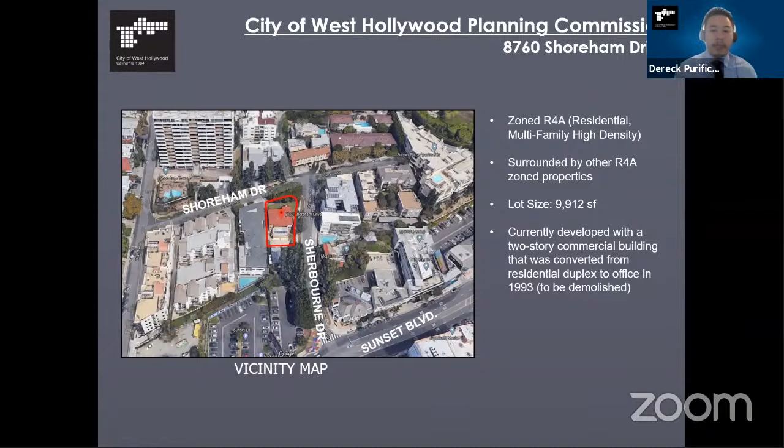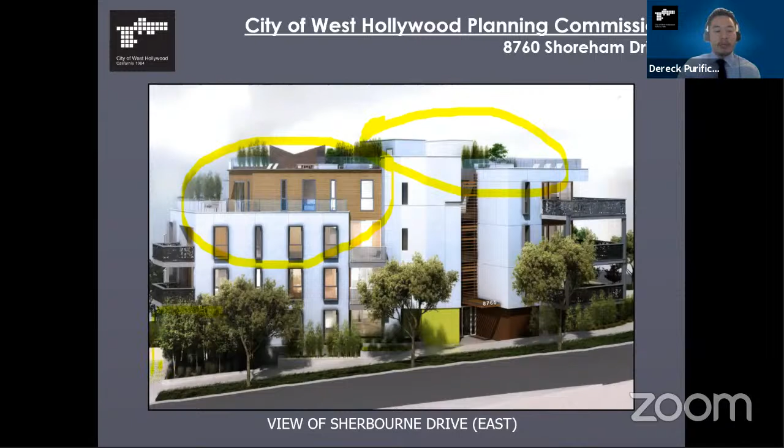The subterranean garage houses 23 parking spaces, all required parking spaces. Two of those spaces are ADA accessible, found here and here. 16 of those spaces are standard spaces, with a standard parking space being 8.5 by 18. And 5 of those spaces are modified.

Part of the modification the applicant is requesting is to modify the depth of the parking space, reduced from 18 feet to 16 feet 2 inches. Those spaces, as far as width goes, will vary between 9 feet and 9.5 feet. The drive aisle will vary between 24 to 26 feet. Where it narrows down a bit, that's where it would be 24 feet; majority everywhere else, you'll see 26 feet.

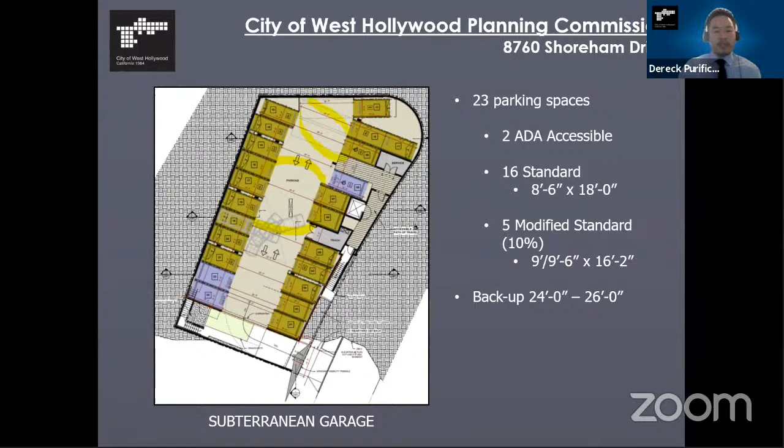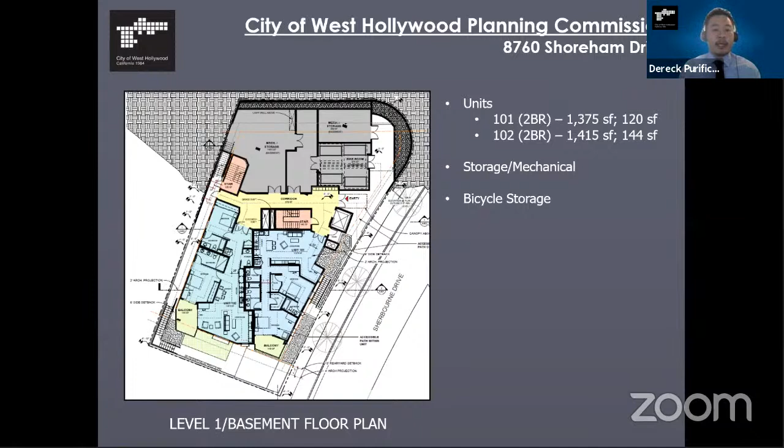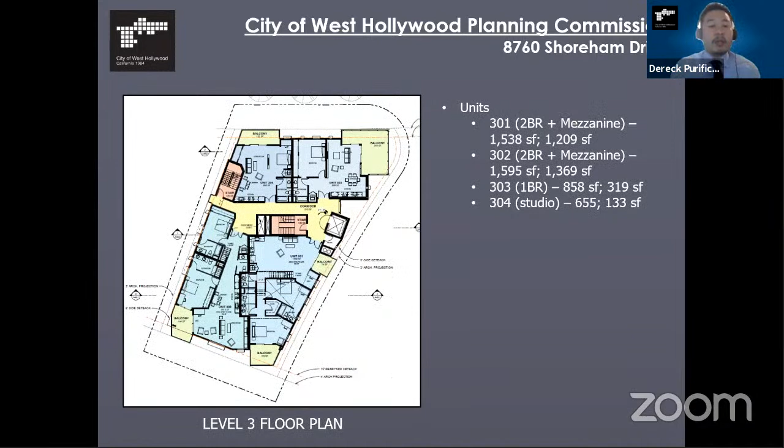Just a quick overview of each floor plan. The basement floor plan and level 1 house units 101, 102, as well as bicycle storage and mechanical rooms. Level 2 houses units 201, 202, 203, 204, each with private open space via balconies. On the 3rd floor are units 301, 302, 303, 304. And on level 4 and mezzanine level, it's just unit 401, on the north side of the building.

This next slide is the roof plan. Essentially, you'll see 3 roof decks, which are private open spaces for units 301, 302, and 401. Here you'll also see solar panels, as well as HVAC or mechanical equipment.

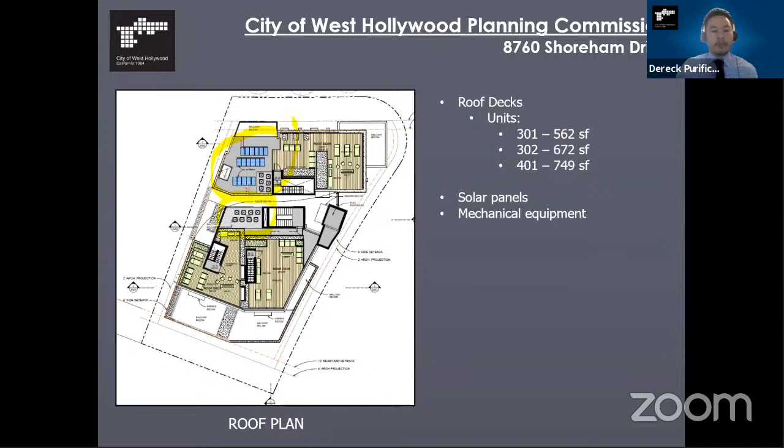To go over real quick some of the changes the applicant made—they'll go into a lot more detail, but briefly, some of the obvious things you'll notice on the right side of the slide is what they're proposing today.

On the left side is what they proposed last year at the last planning commission. As I mentioned, the commission felt that maneuverability was really tight with tandem parking spaces.

A reduced backup space meant you'd be making 4, maybe 5-point turns. These spaces here, the ADA spaces, some commissioners pointed out that the backup space going into the elevator was really tight. So the applicant made some revisions. They took away the majority of the tandem spaces, with the exception of 2 of them up here on your upper right-hand corner, and relocated them to the other side.

The parking spaces that are modified do have a wider space. Basically the rule of thumb we gave them was: if the ideal backup space is 26 feet, for every foot you reduce that backup space, we require an additional 6 inches in width of the parking space. So for example, if you've got a 25-foot backup space, instead of an 8'6" width parking stall, you would need a 9-foot width parking stall. That's what they've done here.

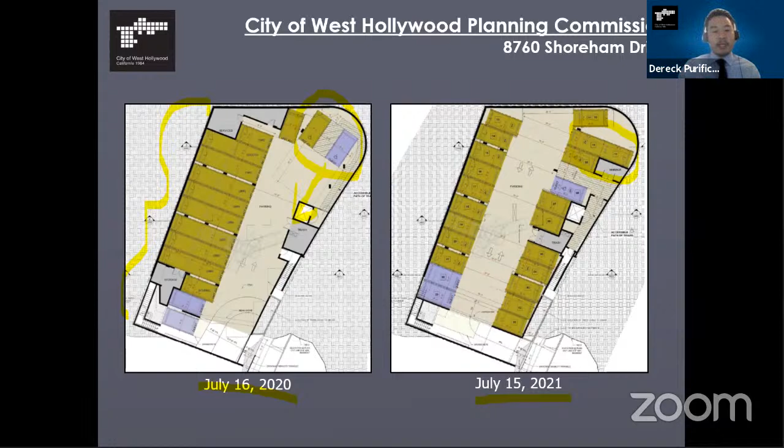That addressed concern 1. Concern 2 had to do with the average unit size. This is just an example of one of the floor plans. They used the same formula on all three floor plans, but the corridors were enlarged here, as well as some of the balconies.

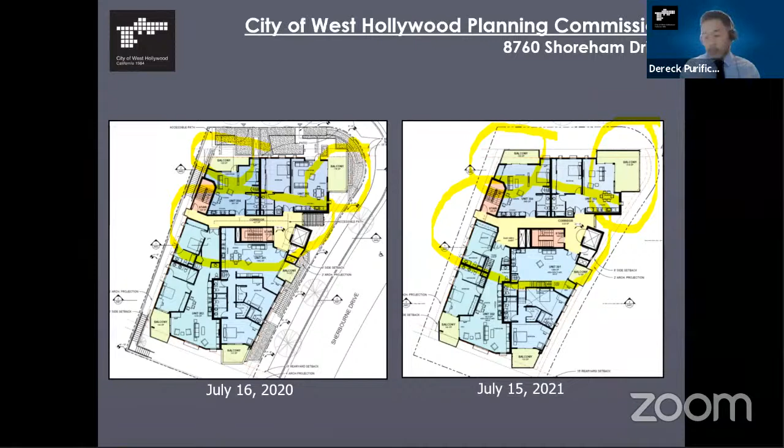By increasing the private open space, common areas, or hallways, it ate up into the floor area of each unit, and therefore they were able to reduce square footages. On this next slide you'll see how they were reduced. Open spaces were increased, floor spaces were reduced, and they were able to get to exactly 1,200 square feet for the average unit size. Some may be larger, some may be lower, but the average unit size will be 1,200 square feet, which is the maximum allowed in the R4 zone.

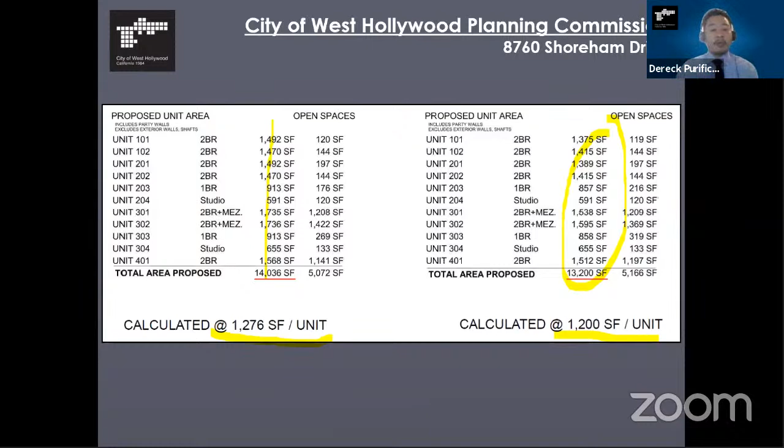With all that being said, the applicant has revised the project to address the Planning Commission's concerns from the last meeting last year. They were able to improve maneuverability in the garage and removed the modification for the maximum average unit size. This project will redevelop the underutilized property and also provide 9 net dwelling units.

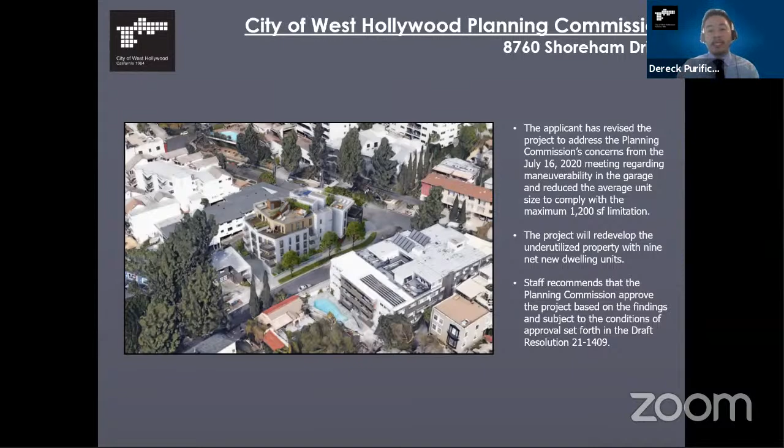Staff recommends that the Planning Commission approve this project subject to the findings and conditions of approval set forth in resolution 21-1409. That concludes my presentation. I'm here to answer any questions you may have.

Thank you. Okay, does anyone have questions for staff? Commissioner Lombardi? Sure, thank you Chair Hoopen-Garner. I have just a couple of quick questions, just to make sure I'm understanding the history.

Being a newer commissioner, was anything reviewed by HPC, and could you maybe provide a recap if so? As part of the revision, it didn't go back to HPC—it never originally went to HPC. There was an HRA done, a historic evaluation of the property, and it was found that the property was not historic. But that review does not actually go to HPC, it's reviewed at staff level, where we have our consultant help us out and confirm what their consultant is saying about whether the property is considered historic or not.

Since it's been revised, it did not have to submit a brand new HRA. Were there any key notes, 1 or 2 items, as to why it was not deemed historic? Offhand I do not know that answer. I can go back to the HRA and take a look at the summary while you guys are deliberating. That'd be great, I'm happy to do that.

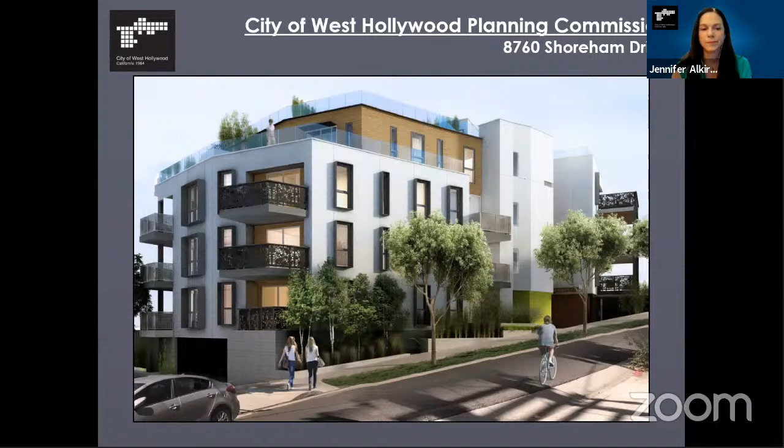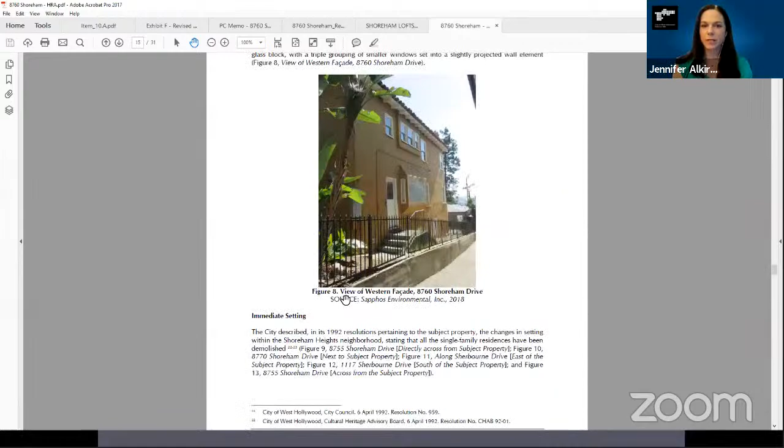Dereck, is it built to the R4 standard maximum? It is, because the R4 is roughly 50 units per acre, which is above, was it 35 per acre? Is the assumption R2 for RHNA? I don't know that offhand, but this is our densest zone. Would this count toward the new cycle? I believe so, but we would have to confirm that. I'd have to look at the numbers. Okay, those are my questions. Thank you.

Thank you, Commissioner. Commissioner Vincent, did I see your hand? Yes, thank you, Chair.

Can you explain to those watching in the public how it works when you have a building on a hill, how the maximum height, 3-story versus 4-story, works?

Sure, it's probably easier to show visually, but there's a couple different ways you can do it, and a couple things you need to take into consideration. Essentially, you take the allowable height from grade at the higher level, in this instance 35 feet, and then at the lower level you take that at 35 feet as well. You have a 45-degree angle, and it has to meet. The applicant actually has a pretty good visual of that in their presentation, and I think they'll be able to go over that. But that's one way you can do it.

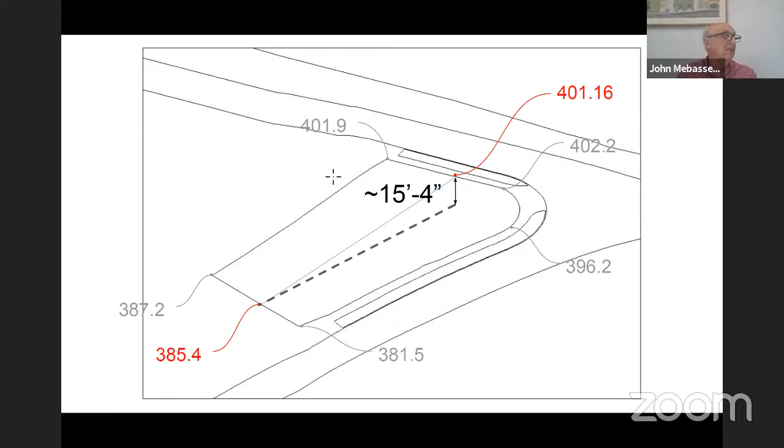So what I'll do is look at slide number 8 and 11. So this is how the height is measured. Basically, you take the average of the upper corner of the lots and the lower corner of the lot and draw a line, and then you establish the average height of the building, and then from there on you develop the height envelope, which is 35 feet, and then you go to a slope of 1 to 2 to get to the upper level, and then your building has to be within this limit.

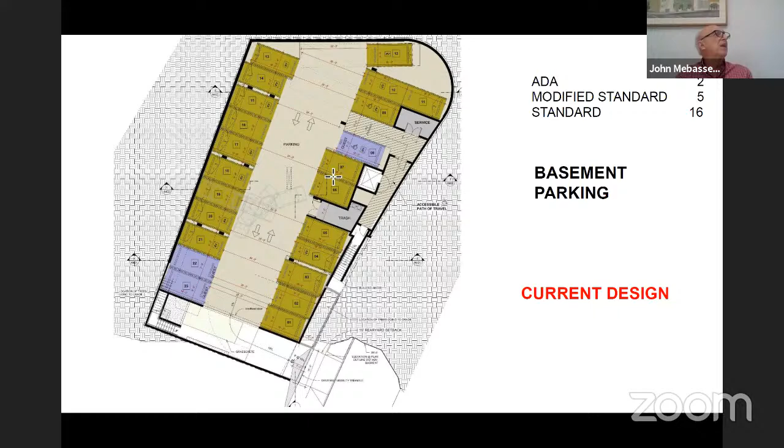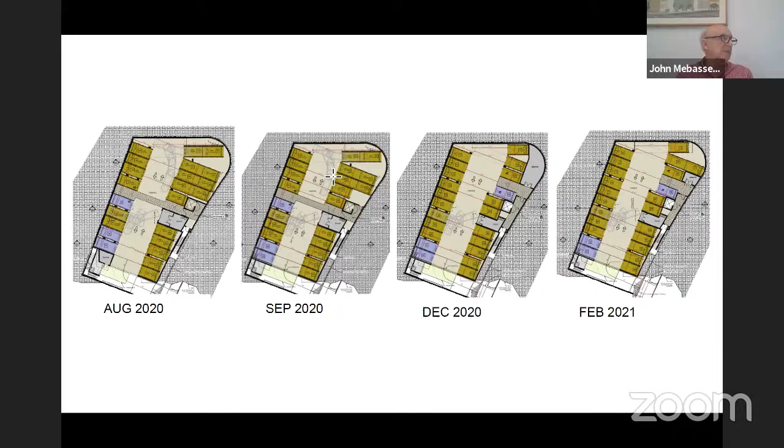Let's just flip through it. So these are the original parking as shown before, and then these are different variations of the same parking that we tried out to get the best result that we thought was agreeable. I just wanted to mention that the 24-foot parking backup space is allowed in LA City as well as City of Santa Monica, so you're within the same limits, if that is any consolation.

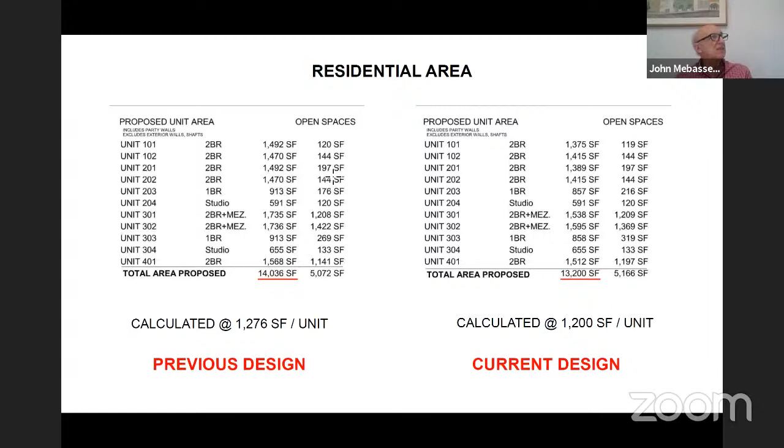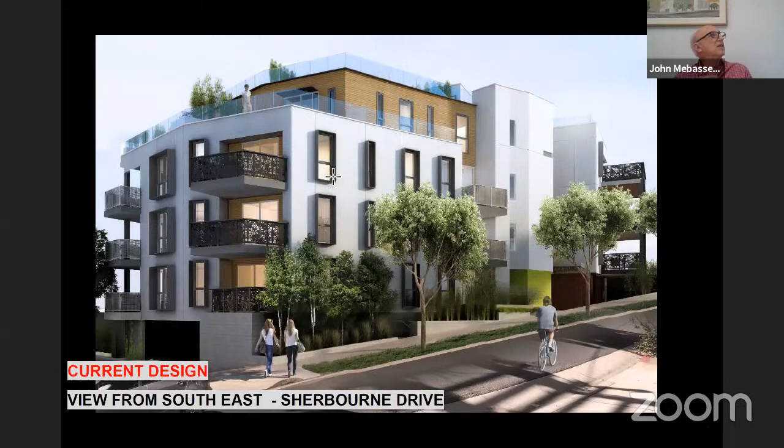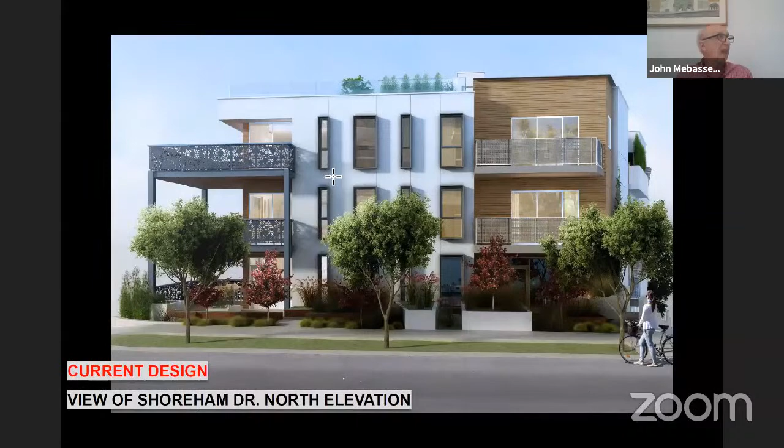And also here shows the average unit sizes and how we did it. And there we just go through to see what the difference is between the previous and the new design. Basically the difference is in the access to the roof, the stairs sticking up on the roof, and also some of the balcony railings, which provided for fixed window washing of the fixed windows and so on. Otherwise, we tried to keep the exterior facade exactly as we presented it before. So all the modification to average the unit size, we were able to do it within the existing building envelope.

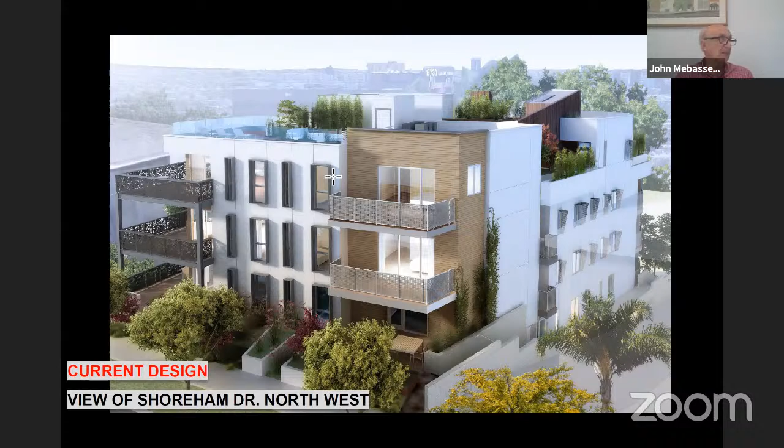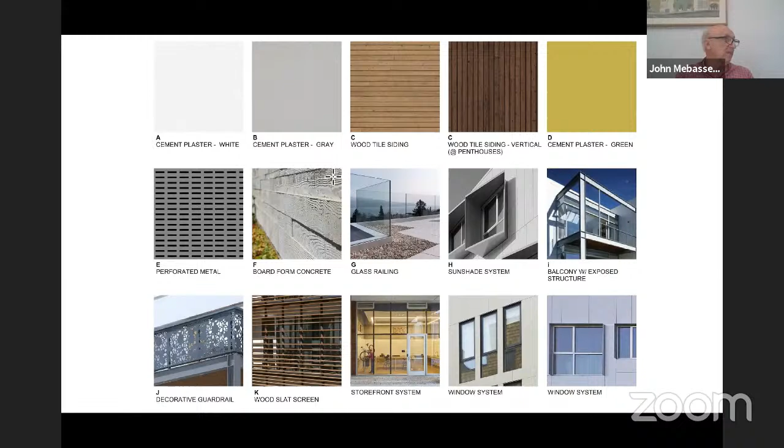And besides that, I don't know what else to talk about. I just wanted to basically talk about the balconies at the corner, which we thought was very desirable because it created a buffer between the public and the privacy of the living room. So it created a buffer, and that's where we got there.

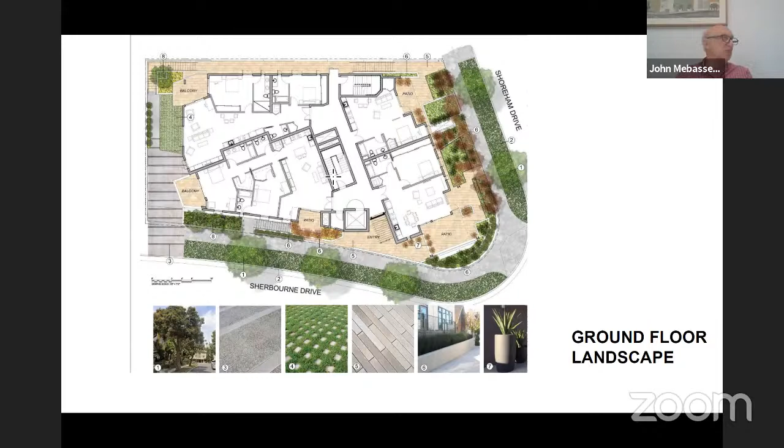And of course, I just wanted to talk about the open parking, open landscape areas, which are critical. We are about twice as much as is required. So I don't know if you're damned to give more landscape area or less, but we opted to do the most we could provide for certain units that it was possible to do so. And as far as permeable planters and permeable surfaces, yes, we have that basically—the reason for permeability is for the rainwater to be filtered, and by providing a permeable paver, the water is percolated through that and is filtered.

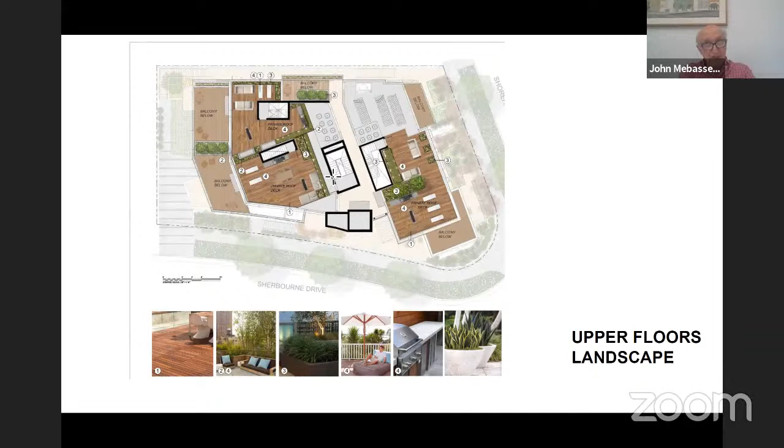And over the parking, the same. We have dirt under the pavers or under the planting, so that would filter the water, and then we discharge that water. So that's about as much as I thought you asked for. I'll leave it open to your discussion.

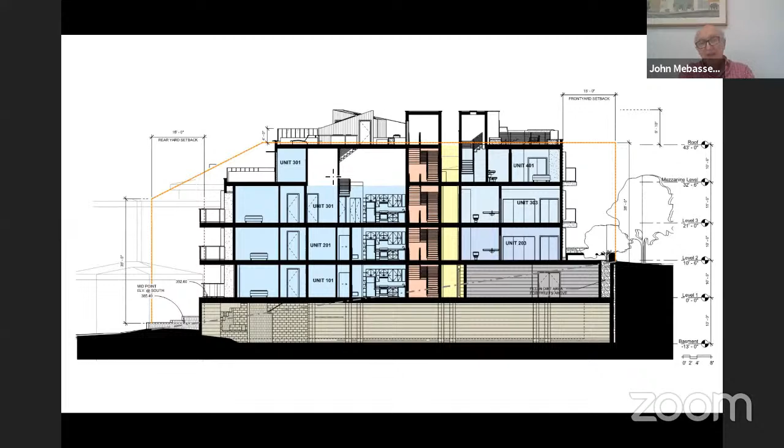And the last is how the building fits within the envelope. This section shows exactly what's going on, where the building is 3 floors on the lower side with the mezzanine above, and on the Shoreham side, it is 3 floors above a basement, which is defined by code to be a basement. So I thank the opportunity to present to you, and I'll be here to answer any questions that might come up.

Thank you. Are there questions for the architect?

Commissioner Vinson: I noticed on your square footage for the open space for unit 101, in your presentation you have 120 square feet, which is the minimum. But in the drawings that we were provided, it shows 119 square feet. Yeah, so that's basically moving the wall 1 inch or 2 to make the difference. We'll do that in the working drawing as we present it to the city, and it's going to show that. Basically, it's the computer, the way it averages the area that it calculates, and it automatically came to that. That's how it's shown.

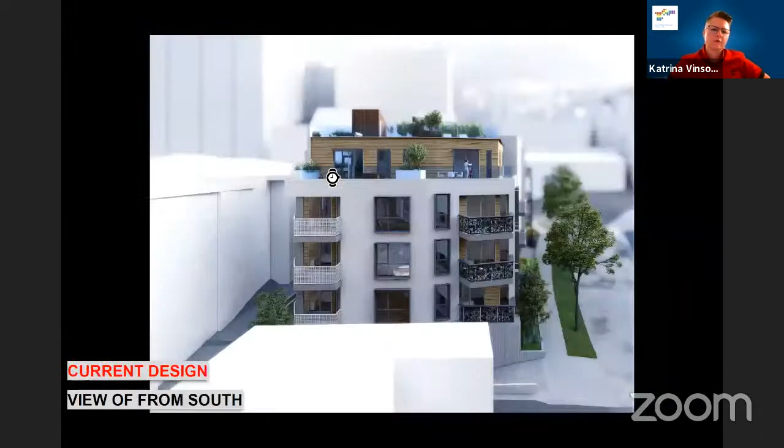Okay, can you one more time bring up the drawing for how you calculate the envelope? So I see that you go to a 2-to-1 slope. How do you know how far back, how do you calculate how far back to go to that 2-to-1 slope? So when you hit the upper surface, you have the 35 feet on Shoreham coming up on the right-hand side of the drawing, and then you take that plane and continue it to a point where the 2-to-1 hits it. So it creates an envelope.

But are you not going horizontal back and then dropping to a 2-to-1 slope? No, because you could have that 2-to-1 slope at those 2 different elevations. That gives you - the code doesn't require you to step back. It tells you to connect the 2 planes, the horizontal and the vertical plane, at the slope of 2-to-1. So you develop an envelope which is exactly like that. That's how the code is written.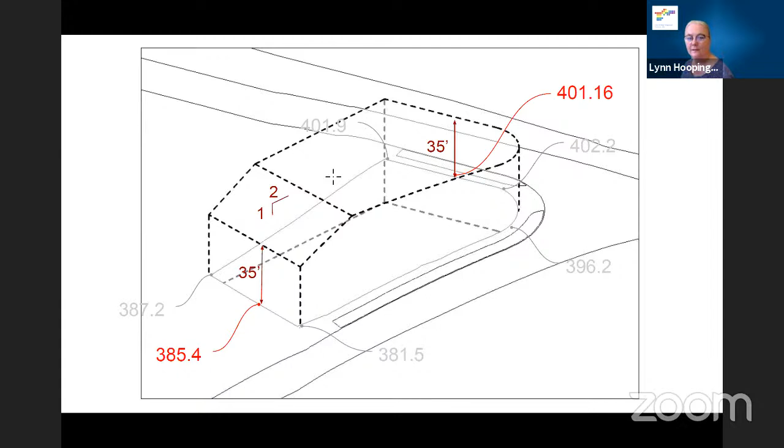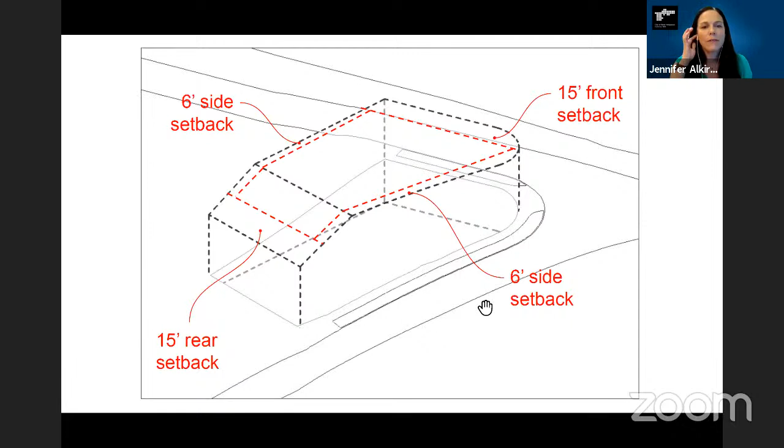So if I can share my screen, I think I can pull up where this is described in the code, and it might be a little bit easier to see. So John, if you could stop. Thank you. Let me just try this.

All right, and so do you see this, where it's the code language here? Yes, I can see it. Okay, so we take from the lower side, you measure the maximum height, which in this case I think is 35 feet, up to a point - that's that line. From the higher side, you do the same thing to 35 feet. Then from the lower side, you do an angle here, 2-to-1, from this line extending up into space forever. But then where this horizontal line comes and connects to it, that's where that intersection point happens. Does that make more sense? That makes total sense, I got it now. And I just wanted to clarify that too for the public. Great.

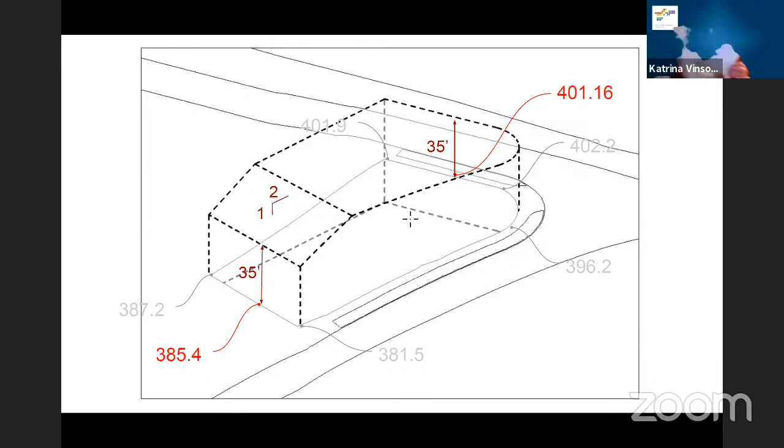My next question was - I noticed unit 204, which is by far the smallest unit, is less than half your average square footage per unit. Is there any way to increase the square footage of this unit? I also noticed most units have closet space in the bedroom - I realize this is a studio - but this one only has one closet, in the living room. I was wondering if there's any way to design it to increase the square footage.

I've been involved in designing a lot of units in San Francisco, and really we feel that you don't need that big of a space for a studio unit. Also, it could be sold at a much lower price than the other units, and also a much lower rental if it was to be rented.

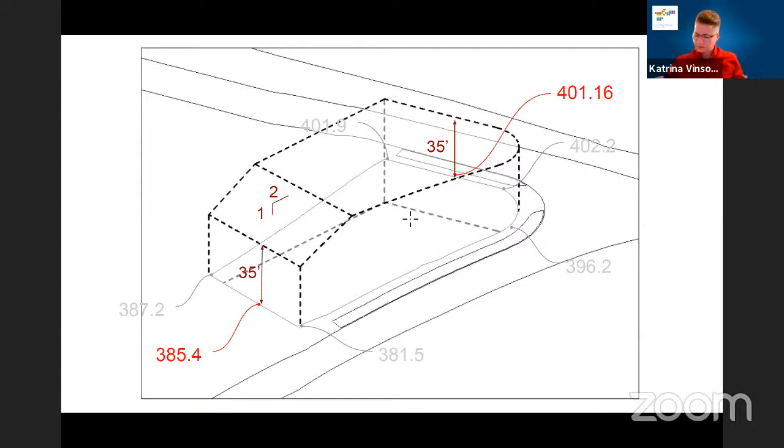My last question was on A203 - it seems there's a note for 306, but there's no unit 306. I believe that's just a typo, but I thought I'd point it out. Oh yeah, that's just a typo. Exactly. Okay, that's all my questions.

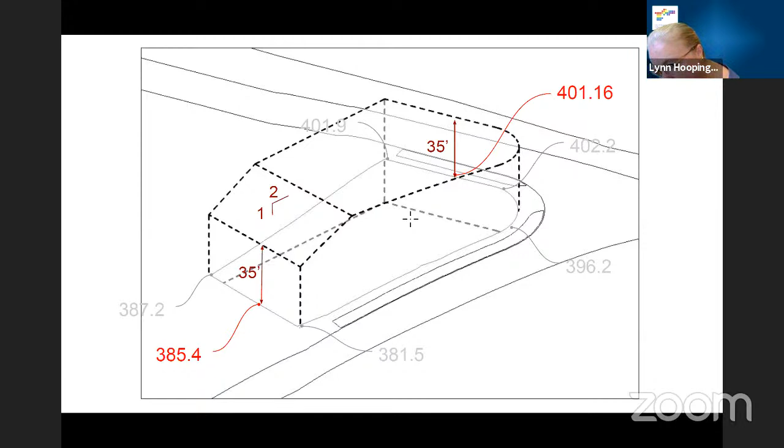Which planter are you talking about? Plant a deciduous canopy tree, minimum of 36-inch box, planted in the ground on exposed west and/or south elevations, 1 point per tree. You have awarded a point for the one strawberry tree that is planted in a planter on the east side of the building.

Well, we can also plant one in the area where the stair wraps up and goes on the podium deck at the parking level. If you look at that level, there is a planter opposite the driveway as you drive in, and we could have a tree there if the other tree doesn't meet the requirement. So the point is the planter.

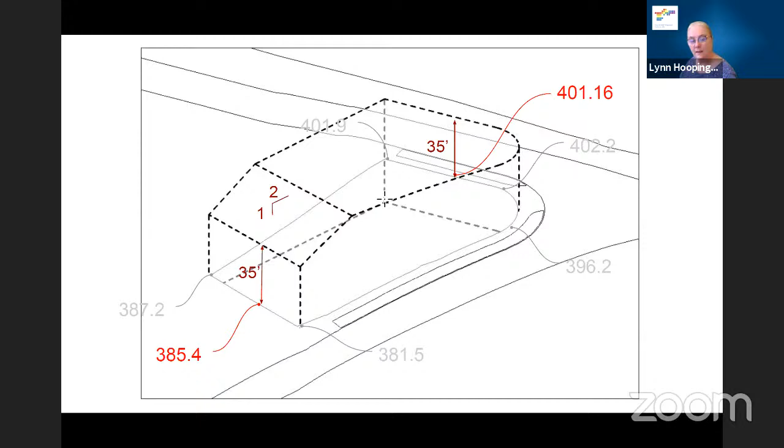There it is, it's on the landscape drawing. Maybe we could show that. It's on L10. Yes.

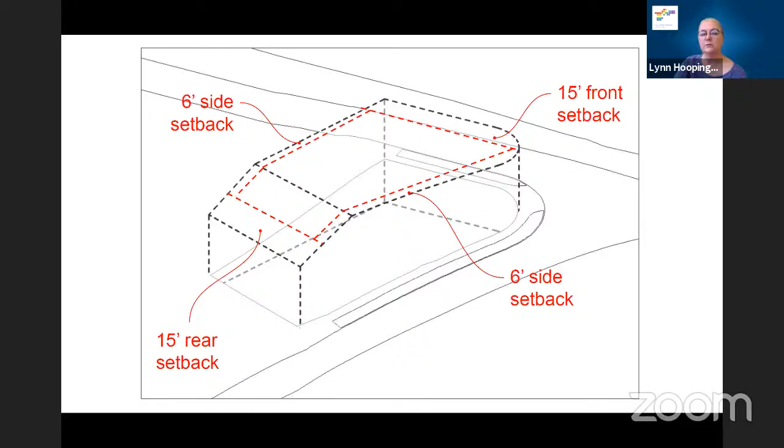The point is that a canopy tree needs to be planted in the ground. It is on the ground. There's nothing that says it's in a planter. No, it says there are planter walls, but there is no concrete below it. So it's a raised planter of 3.5, 4 feet, and the tree is planted in it, but there is no basin, no concrete floor. The planter has an open bottom, so it's into the dirt.

But it's above the garage. No, it's not. The garage starts beyond to the right of the driveway, not there. There is no garage underneath this surface. It's a continuation surface of the driveway coming into the garage.

Okay, then the landscape plan is what was confusing because it was saying that was in a raised planter. Okay, thank you for clarifying that.

Last question is, can you explain the extraordinary large mechanical rooms on A201, I believe? Yes, A201, you've got one mechanical storage for 1,410 square feet, and then another one for 359 square feet. So that's pushing 2,000 square feet of mechanical.

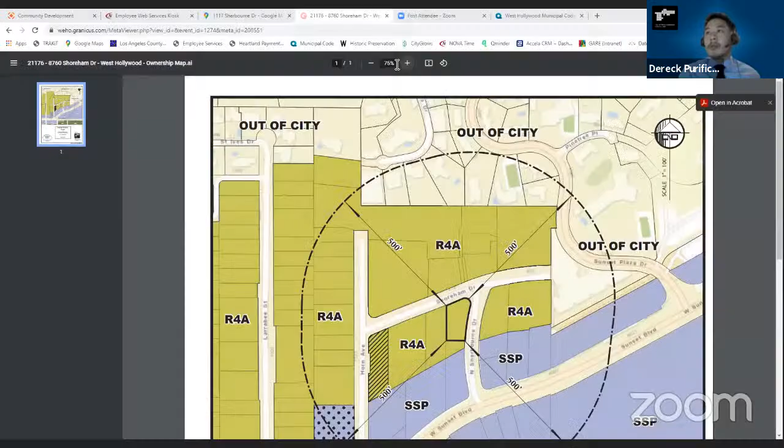Yes, thank you. Sure, so as I was saying, the radius mailing is a 500-foot notice. It's taken from the property line surrounding, and you take a 500-foot line and you connect all that, and so that becomes your radius. Everyone, whether you're an occupant, a renter, or a property owner, you should be getting a notice if you fall within that area.

So if my understanding is correct, Whitney lives in the property immediately to the south of this. And there was another speaker, I think, Michael.

Yeah, I just want to jump in. I'm Whitney, and no, I live right next to it. Oops, you cut off. I just want to clarify, I live at 8770 Shoreham Drive. That's right next to the building. No messages, no one in my building ever got any notice of this. Nothing. Okay, so that's immediately to the west.

Sue Buckner. I don't want to keep calling on people, but I'd like to just get some statistics here as to what's going on. It sounds like a significant number of people, and that's problematic.

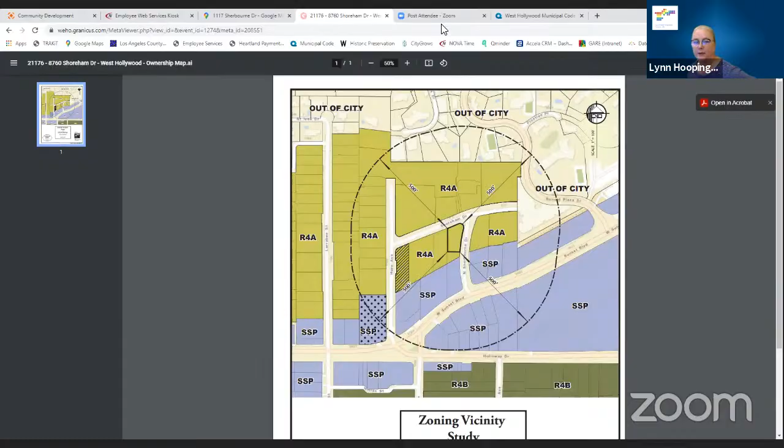It is, although I think staff will report that they have a list of all the mailings that went out, and these buildings are on the list. So if we want to take a moment and take a recess and try to figure out what's going on, but the staff, the city's, I'll let Jennifer speak.

Yeah, I can just comment. I pulled up the list right now. There's two lists, one for owners, one for occupants. And those addresses that were mentioned are on the list. So we have a consultant that creates the list for all of these projects, for everything we notice for. And then we have another company that does the actual mailings. Then they certify that the mailings went out to everybody on the list.

Once those go to the U.S. Postal Service, it's out of our control at that point. So we control everything that we can by getting the list, checking the radius map, checking the list, and giving it to a company that then certifies that the notices went out. I'm not sure if there is something going on where resident mailing, if it doesn't have an actual name, isn't going to people's post office boxes or something like that. I don't know, but we do have all of those addresses. 8770 is on here with a number of units. So I'm not sure where in the process that breakdown is happening.

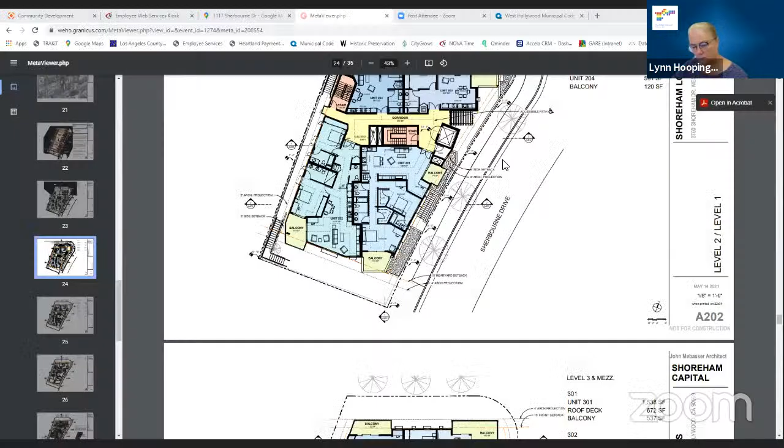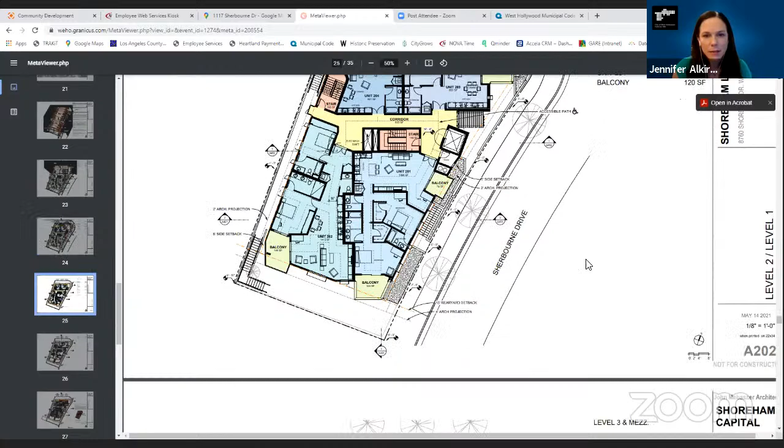Are you speaking about the balconies at this point, or the subterranean portion? The balconies, on A202, you've got those steel beams that are 4 feet into the setback on the north side, and 2 feet into the setback on the Sherbourne Drive side, bringing that structure right up to the sidewalk. Trying to see where it might be in the render. Yeah, it's A302, I think, is a good depiction of what you're talking about. Well, A202 actually has the steel beams. Wow, I get that, but you can see that they're, because that almost, it almost looks like it's, anyway.

So I guess there's nothing in the code that says yes, the steel structure that holds up the balconies is also allowed to encroach, but it's not restricted either. The code is silent on that, from what I can see, and I'm paging through it right now. That's where I'm looking.

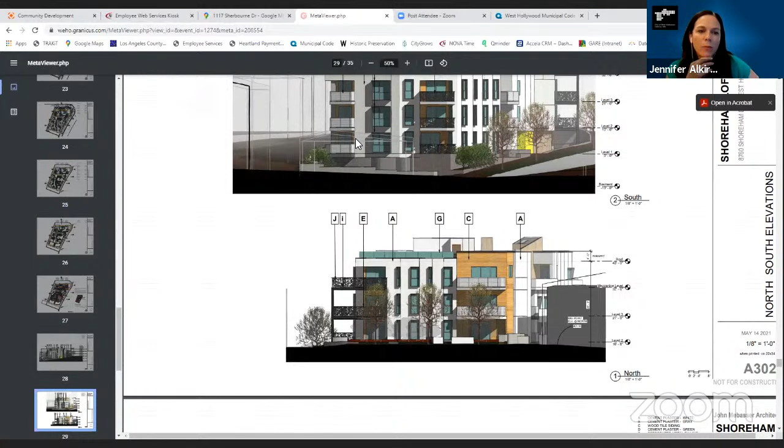But let's be clear about the intent of the code as well as the code itself. It was about keeping the setback and not having the building encroach into the setback. And now we have large steel beams sitting in the setback. So what I would suggest is to see if there is a way that the applicant, maybe the architect, can speak to whether those can be cantilevered. That might resolve your issue.

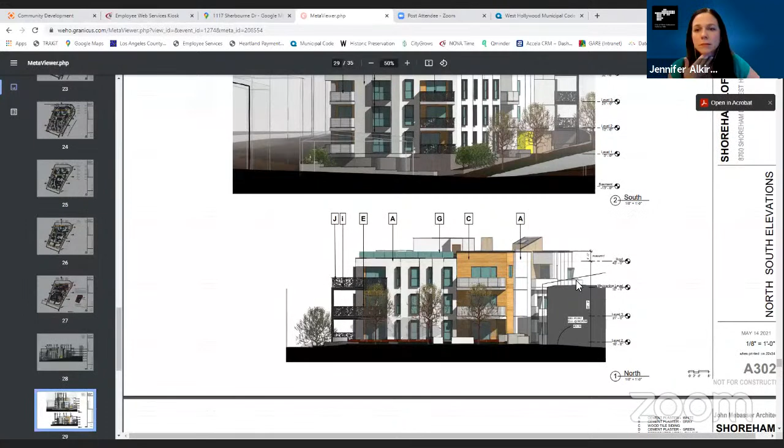Well, it'll fundamentally change the design. I mean, part of it, I think the way that we're reading the code is that is permitted. So, but we can ask. May I interject and just ask one question? The locations of this structure, have they moved or changed from the previous hearing?

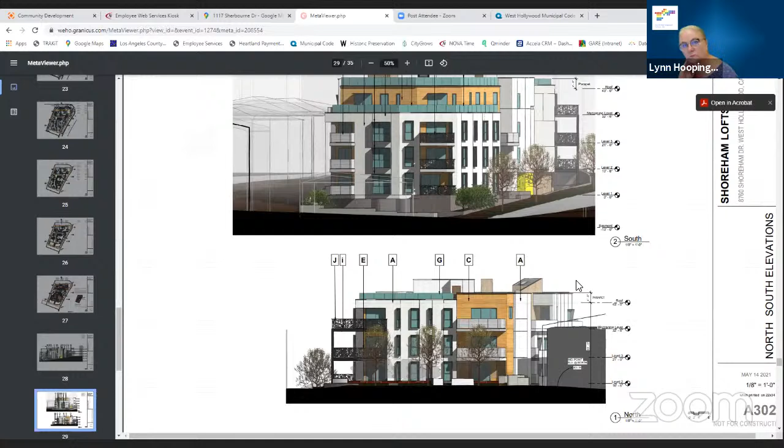No. Okay, thank you. We were unclear as to how the reduced unit size and the reduced mass would be addressed. The unit sizes were reduced, but the mass was not. But the structure was still there. The structure has not changed. Those columns holding up those balconies are consistent from before.

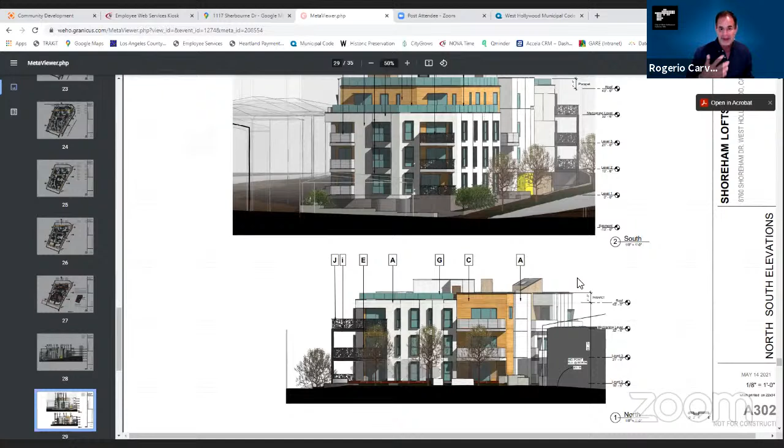So it really goes back to interpretation of projection. Are those columns that hold up the balcony considered part of the projection or part of the building, as you seem to be interpreting it, Chair Hoopingarner? Well, it's structure. It's a very large steel beam, 3 very large steel beams. So that is, and to address, the visual mass of the thing.

I will say that I support the idea of reducing the mechanical room so we have more permeable space, but I'm okay with the projections as presented. So to address that issue, Derek, if you can go to A201.

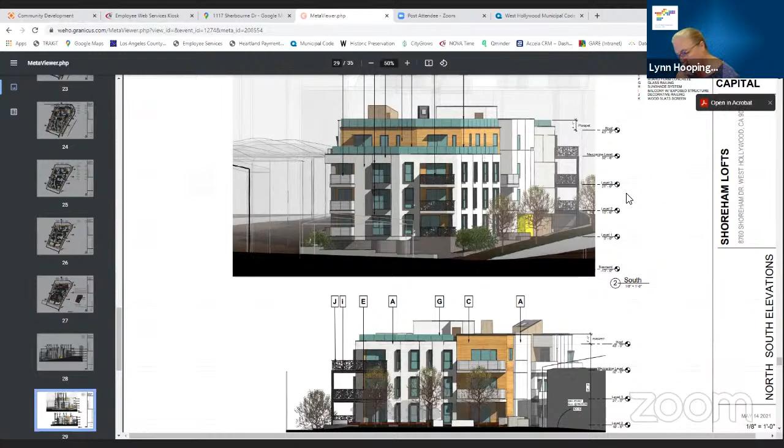You see that this mechanical goes right up virtually to the lot line. Back to permeability, there is none here. There is a nominal amount of permeability and a massive amount of mechanical room that could be significantly pulled back many feet and give an additional ability to put in-ground landscaping and get some green points for some real canopy trees in the ground.

So, it would make sense to bring it back to the setback. Absolutely. I think that would be a clear place to delineate it.

With the parking structure directly underneath that, would that still be considered permeable? No, but it would give us significantly more, 10 feet of additional soil, perk ability to support large trees, etc. Agreed. It wouldn't be quote unquote in ground.

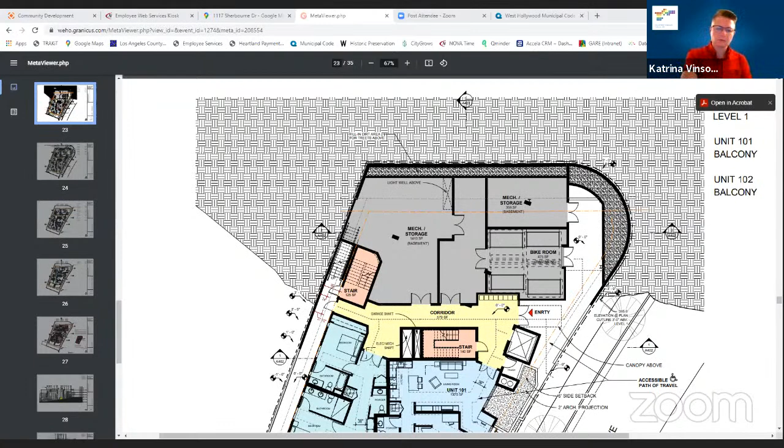And I think that would substantially improve the project and allow for significantly better landscaping than currently exists. I'd agree. I think this would be a nice improvement. And I had concerns about relationship to the setback lines as well. So I appreciate all the commissioners that are discussing this and concur.

Just for the record, that being said, I still do not like the parking. I do not like the cars encroaching into the drive path. I think, to Commissioner Vinson's point, that parking space number 12 is just a hot mess. Getting out of there is going to require a 5-point turn at a minimum. And I don't feel very comfortable with encouraging this type of layout. I think that there were opportunities missed.

Having a trash room right at the front of your lobby entrance is just baffling to me. Why that trash room wasn't moved to the backside of the building and the elevator scooted down, that would have given you a lot more room for the parking, and you could have modified the parking in a way to make those spaces actually accessible.

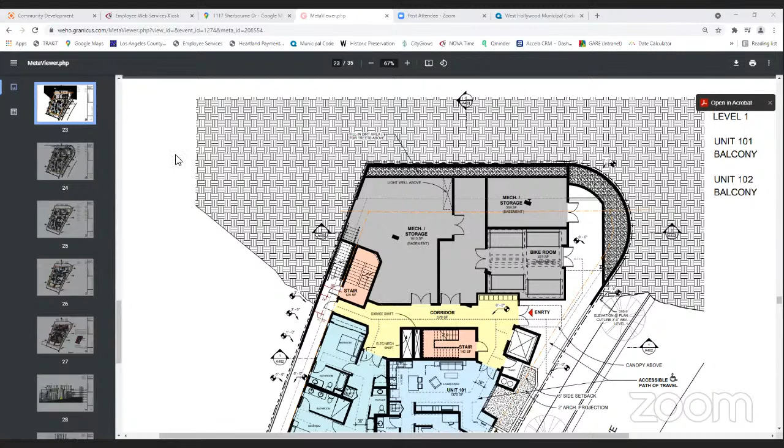Sorry to cut in. Could I respond to a few of these questions? Yes, we can reopen the public comment portion of the hearing. If you have suggestions, ideas on ways to improve this.

Well, let me talk about the balcony at the corner. We can certainly pull the columns back and make that balcony smaller. We thought it was a great feature for the project. And that I think is possible. Or we could cantilever some beams or something like that. Structurally, I'm not gonna promise that, but I think that's one thing.

But the other thing about the mechanical room and all of that is that otherwise you would be holding 10 feet of dirt on top of this parking structure, which really doesn't make sense. If I can achieve what is required by code and don't compromise the building by holding 10 feet of dirt, which is huge, in this building, why should I do it? So I think those 2 points are what I could suggest.

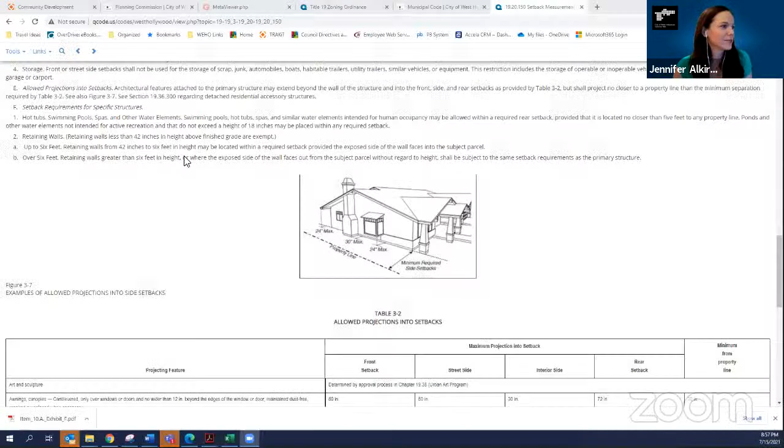This is the second time I've shared the code today. Can you see it now? Or no? No. It's almost there. It's almost there. How about now? Thinking hard, thinking very hard. Yay. Okay, good. All right.

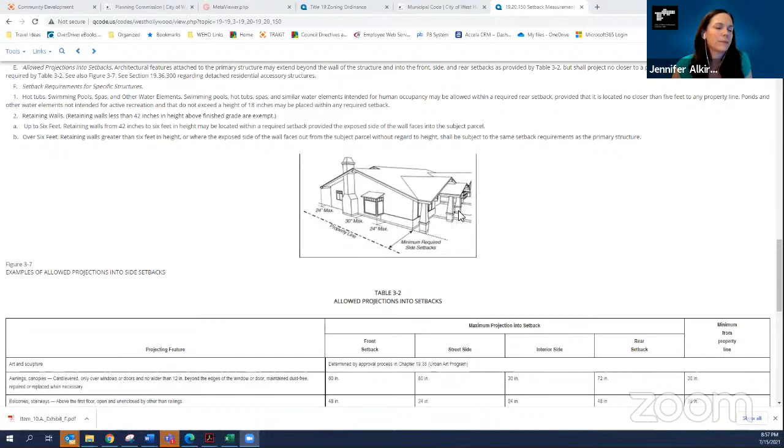So this is the table here that shows allowed projections into setbacks. And here is a diagram, figure 3-7, that shows examples. It kind of gives us a house that gives examples of what is meant by the different projections. And here we can see where a porch is supported by columns. And I get that this isn't the same thing, but it has the same description in the table under here. If you go down to porch, it can be covered.

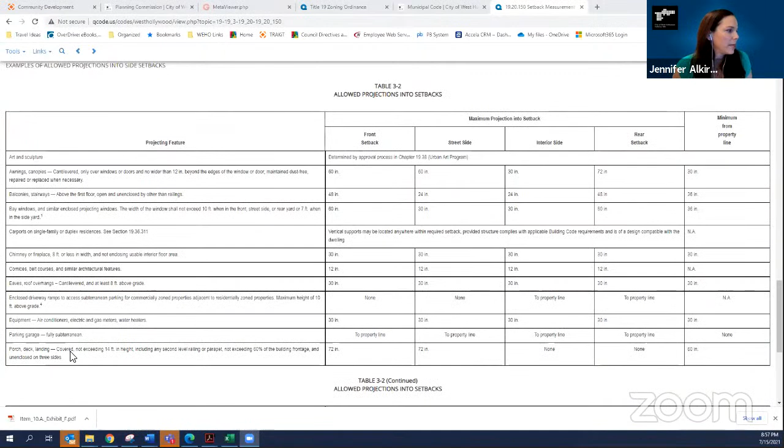Would you just tell us where you are in the code? Because we're looking at pretty dang tiny text. If we can pull it up on our own computers. It is, and I should know the citation by heart, but I don't. 19.20.150, setback measurements and projections into yards. And it's nice if the code were all in the right places. Yeah, here we go. 20.150. Okay. Yep. Got it.

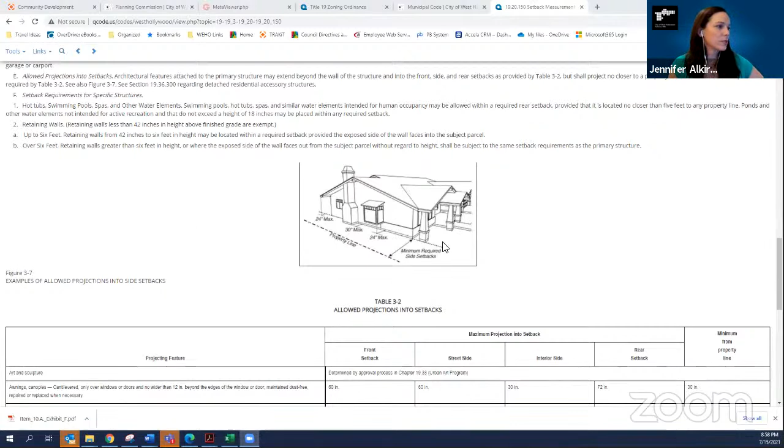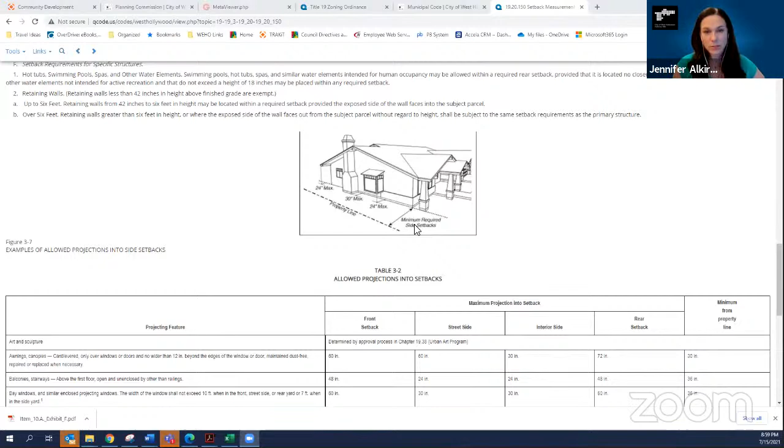Okay, so this is the section that tells us how we measure setbacks in all different situations and what can go into those setbacks. So if you scroll down to here, this is letter E, talks about allowed projections into setbacks. It references figure 3-7, which is this, and table 3-2, which is the allowed projections into setbacks table. So the language around, like I mentioned earlier, the language about the setback projection for balconies doesn't talk about support structures specifically. But it does say above first floor. It does say above first floor.

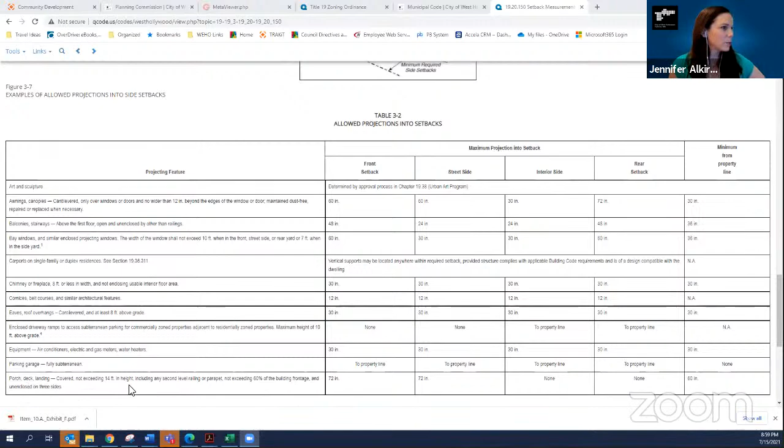Okay, well let's get through the support structures and then we can address that. So we've got porch, deck, and landing allowed to go into the setback, and that is referenced up here in this porch, and the porch does have supports.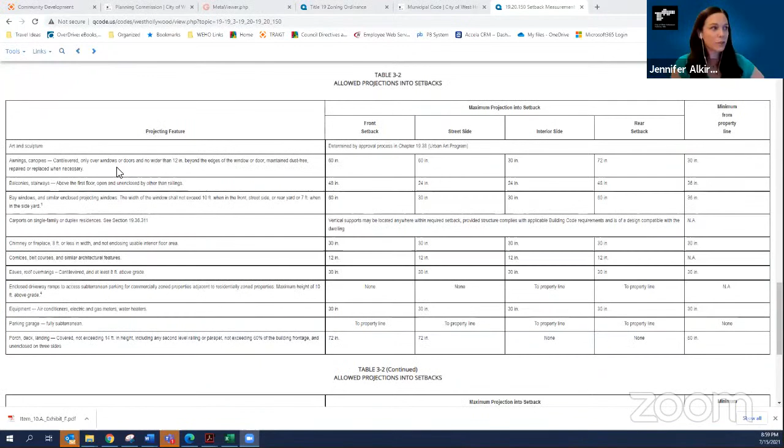Since this image doesn't have balconies, but since the description is similar, we're interpreting this to mean that the support structures for the balconies, similar to support structures for a porch cover, are allowed to go into the yards the same distance as the structure called out in the table. So if a balcony can go 4 feet, then its support structures could also go 4 feet into the setback.

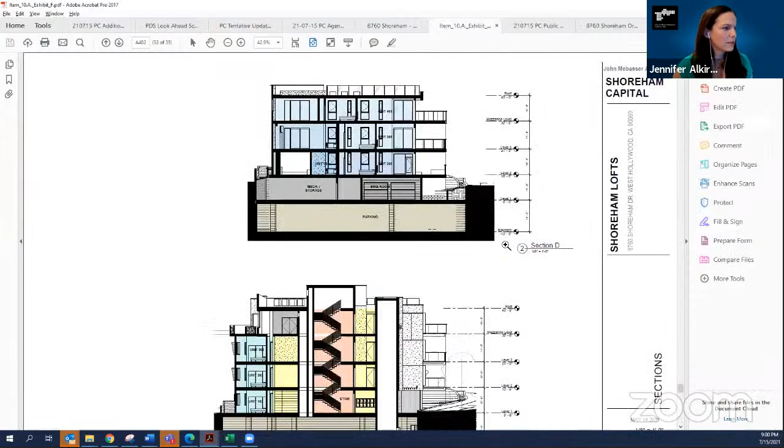Now, your other question was about the— Could I ask a quick question, Jennifer? Yes, of course. So are you looking at, did you say porch, deck, and landing from table 3.2?

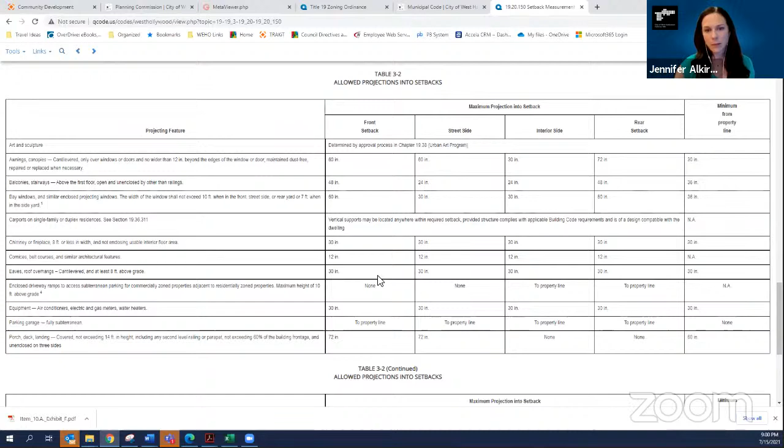It says, because that one says covered, not exceeding 14 feet in height. Yes, so what I'm doing is drawing a similarity between how it talks about the porch and how it talks about the balconies. Neither case does it call out specifically the support structures, but we have an example here that shows that support structures for a projection are included into that projection.

Does that help? That's where we're coming from, because the code is silent on whether the support structures for a balcony can also encroach, but because other similar projections can with their support pieces, we're using that to say that the balconies are the same.

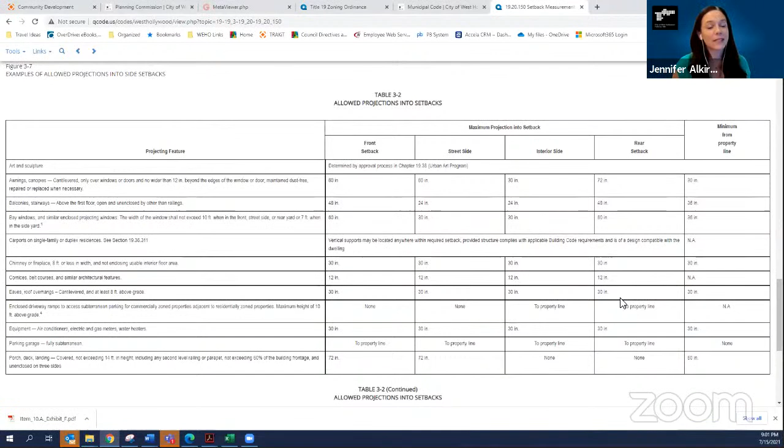Does that make sense, Commissioner Lombardi? To some degree, yes, it's a little vague. It's not perfect. It would be great if the code said yes, also the support structures, but in 2001 when this got written, I guess they weren't having the foresight to see us sitting here tonight.

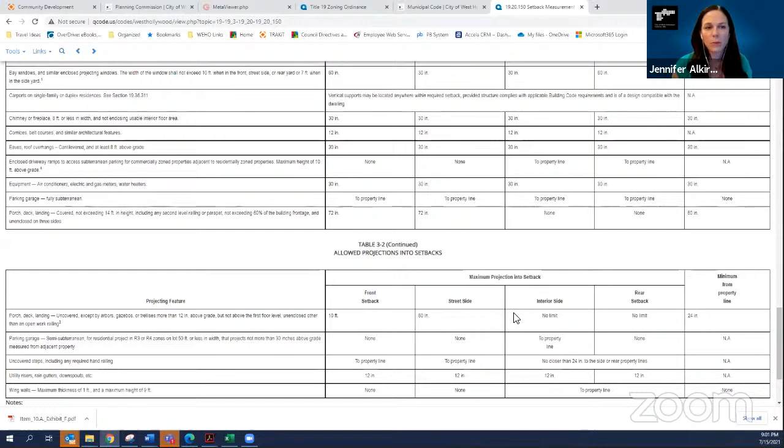And then, Chair Hoopengarner, what was your other question about the first floor? I'm gonna unshare for a sec. Before you leave that page, can you scroll back up to figure 3-7?

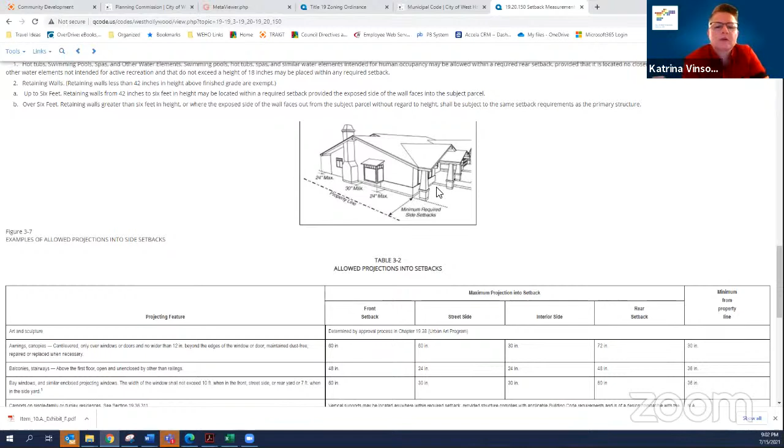So what I'm seeing in this figure, correct me if I'm wrong, is there's an arrow between it says side setback, minimum required side setback, and there's an arrow between that line, which is the property line, and the side of the house. But it's not really referencing the front of the house, where those columns are. It's more showing you all these examples on the side.

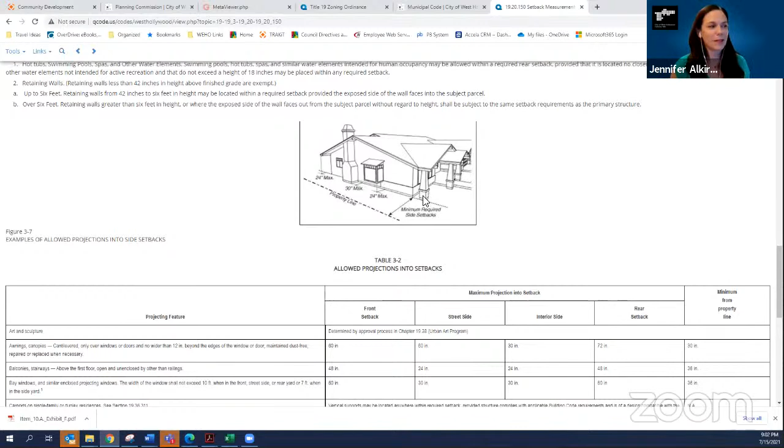Yep, this porch is showing a porch projection. I'm not sure why they didn't call out that line there. Again, I'm not sure why that is. Yeah, it still makes it confusing.

Well, and that's why, I guess, we have to make interpretations. The zoning ordinance can't address every single thing possible that someone can come up with. And so that's why we have to do interpretations and try to make our best understanding of things. If you look at the definition of structure, which got us into this thing, it's anything that's put together. So everything about a building is a structure. So that would be an inherent conflict in the zoning ordinance saying you can't have a structure in the setback when a balcony is a structure.

So anything you put in any projection into the setback is a structure according to our definition. So we always are having to interpret things when there's fine lines like this.

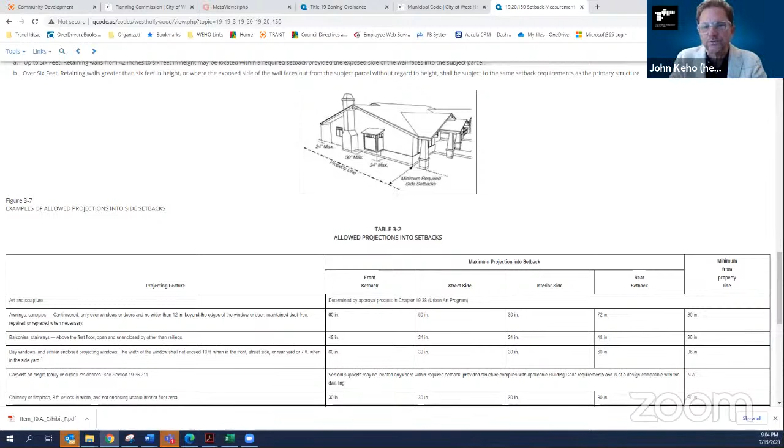While this image doesn't show that the setback curves and goes around both sides, we do know that front porches are allowed in setbacks. And this image also shows that a front porch can be covered. So we've made the interpretation that supports for these objects, these structures, are okay. And also, if it's part of the architectural design or architectural projection, we interpret architectural projections, which are structures, to be able to go into setbacks and projections in order to make the buildings more interesting than what they would be otherwise.

So thank you, John. And since we do have our city architect here, and this seems to be an architectural conversation, perhaps we could have Mr. Abramson weigh in on this subject. You really want to complicate matters, don't you?

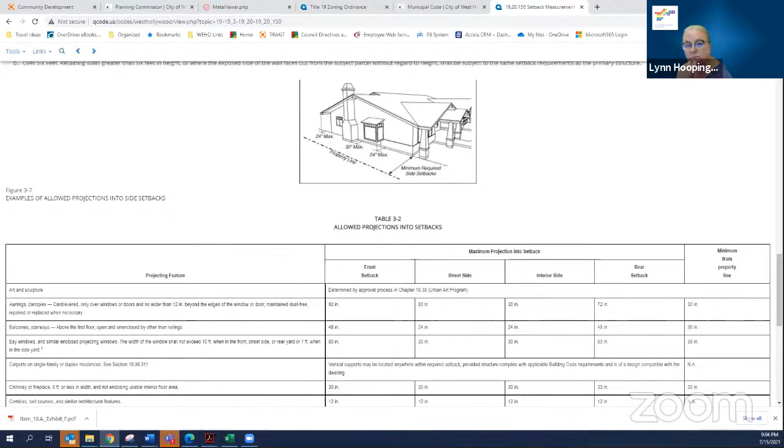Yes, please. Okay, well, I think, speaking from an architectural perspective, there's a distinction between balconies and decks. And what is to the west of this area we're talking about are clearly balconies. They're horizontal projections that extend off of a building. I would say these are actually roof decks, or decks or terraces that are on the corner that you're discussing with the structure.

My concern in designating them as balconies is that, let's say what comes before you is a 6-story building with balconies projecting, and they want to connect all the balconies with columns up the entire facade. That's just called supporting structure for the balconies. That would be a very different thing.

So from a classification standpoint, I think the operative thing is that architecturally these are decks, which are allowed projections, at least the ones we're talking about on that corner. To me, that's more close to the intent than a balcony in this case. So that's my two cents.

So what are you saying? Well, I guess what I'm saying is that decks are allowable projections, and that's what should be operative for that portion. Jennifer, do you disagree with that or not? In terms of decks, they're still allowed projections in the code, but they're restricted more by definition to be something a little bit different than this.